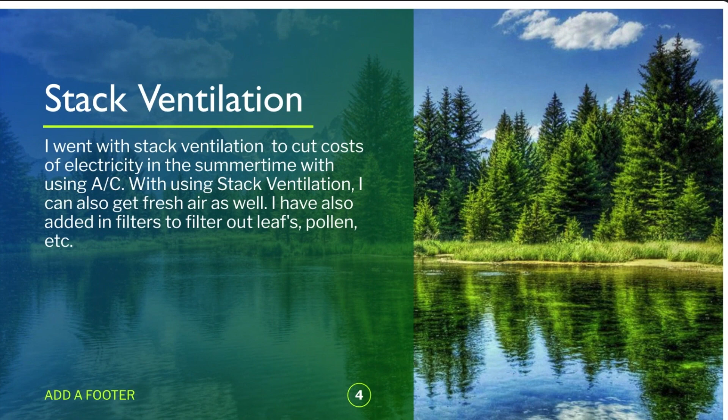In the summertime with using AC, and with using stack ventilation, I can also get fresh air as well. I've also added filters into the sustainable house, which you'll see pictures of, to filter out the leaves, the pollen, etc.

So rain runoff, I went with rain runoff because I can collect the rain in barrels and use it for other necessities that I may need, especially for the hydroponic system that I'm planning on having. The stained glass windows, during our research that we were going through, me and Elizabeth found out that stained glass windows actually are a sustainable resource. They're made up of recycled materials, but they can also bring in more light, and they also look very beautiful, and they can liven up anywhere.

You cleaned up? Put the paper and pencil away.

The geometry that was used in the Pennsylvania house was rectangular prisms, cubes, cylinders, half circles, and then the perimeter of the house, the area of the house, and the volume, you can see those measurements there.

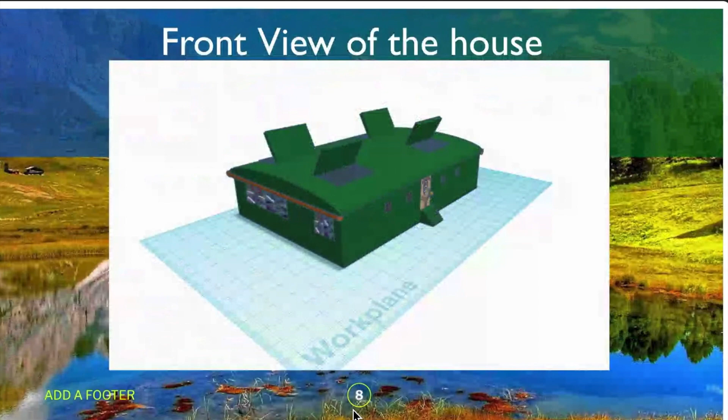So this is the front view of the house. As you can see, the stained glass windows are there. The filters are also in the stack ventilation up at the top of the roof, and this is only one story as well.

And then this is the back side. I like the stained glass windows. The orange is the gutters, which would lead to the rain runoff, and the colorful looking images are the stained glass windows, and then more of the filters and that stuff.

For the New Mexico house, we used rectangular prisms, cylinders, and semicircles. Inside the barn, we have stack ventilation, and then we have animals like sheep, chickens, horses. We have pigs at the farm too. For example, chickens are sustainable because they can provide both meat and eggs. Horses can provide transportation, and it's good not to use something that puts CO2 emissions in the air.

Our dimensions for the perimeter was 26.69 inches, and then the area was 42.84 square inches. The volume was 124.40 cubic inches.

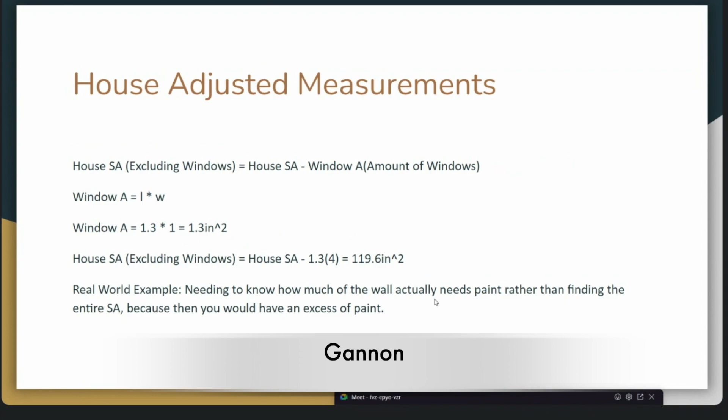You need to know how much the wall actually needs paint rather than finding the entire surface area, because then you're having excess of it. Then you have green roof material measurements. The green roof, you need to know the area in case your seed is per square foot or something, so you don't want to over or under purchase supplies for it. And then the perimeter, you might want to put a glass building around it to protect it from harsh environments, or a fence around it to protect it from wildlife.

The sustainability features. The Earthship-like home that we designed for Pennsylvania has an abundant amount of features which proves its worth in sustainability. We incorporated a green roof due to Pennsylvania's sunny summers, along with their nice rainy days. There are windows on the first floor and in the roof to allow natural airflow to flow within the house. There's also a smartly designed subfloor which is underground for natural insulation, meaning the portion of the house will stay warm throughout the winter but nice and cool in the summer, because it holds a certain temperature. As we could not add many renewable features to the design because of Pennsylvania's severe climate, it is still very sustainable and usable for future generations.

We couldn't add too many renewable sources of energy because in Pennsylvania you don't get a lot of sunlight, you don't really get a lot of wind because there's a lot of mountains, and there's no geothermal energy either.

The renewable food source. Whenever we were making this house, we realized that there was a unique way of incorporating a renewable food source. We added a green roof on the roof of the house so it gets natural sunlight and water, and it also occupies less space since it's not on the ground.

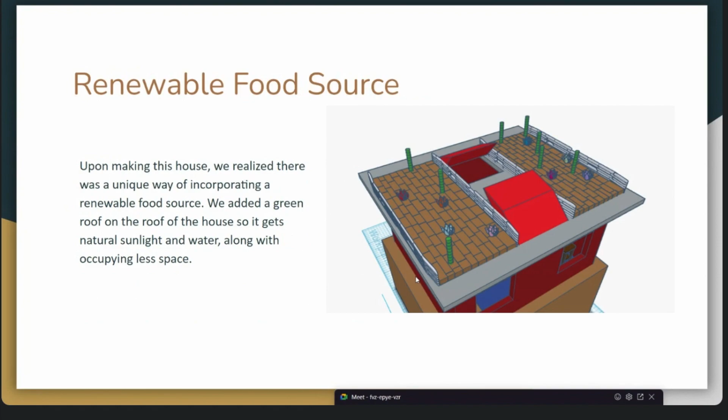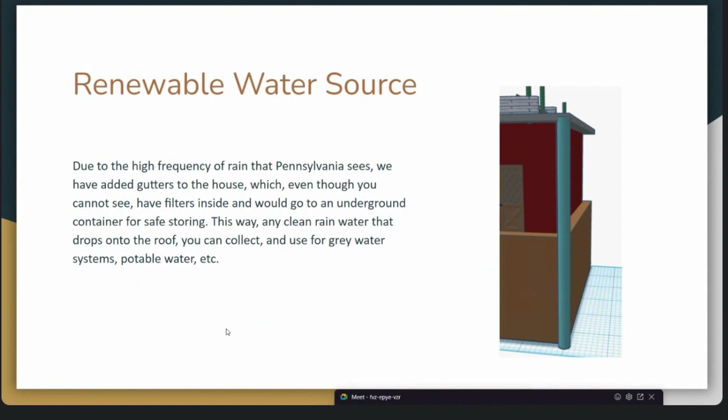Renewable water source. It has a high frequency of raining in Pennsylvania, so we added gutters to the house, which would have filters in them. We didn't model them, but the idea is that they have filters in them. Then they get collected into a storage container underground, so nothing can contaminate them. Then, if you have to, you can use them for gray water, potable water, and many other things, like washing dishes. That is the end of the Google slide.

This is what it looks like in Tinkercad. We did add stuff on the inside, but whenever it got scaled down for 3D printing, the other stuff wouldn't size down, so nothing's really to scale in there.

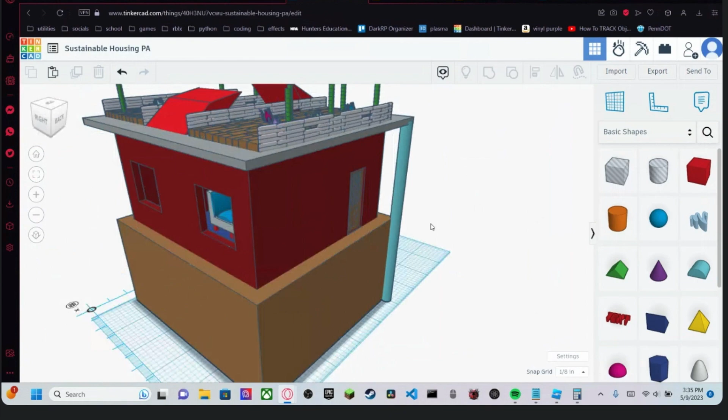The brown part represents the dirt, the part that would be underneath the ground. The red part represents the stuff that you would see, the gray is the roof, and up top are the gardens with the two windows. So that's our Pennsylvania house. It has solar panels, a water collection system, green roofs, and windows, to say more.

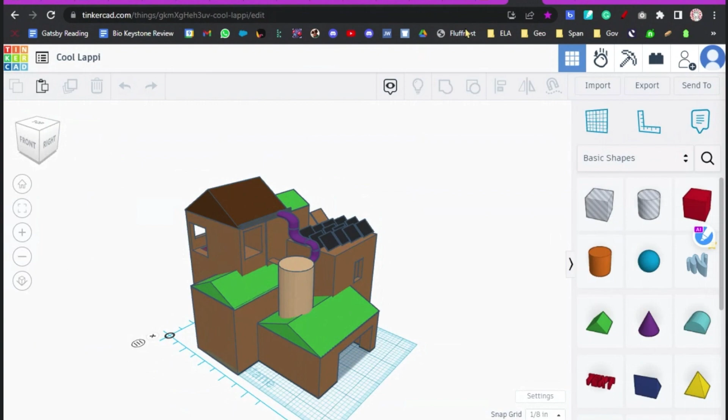So, and the Pennsylvania house has green roofs, arches, windows. Oh, Clinton, Jude's going to talk about the Pennsylvania house. Oh, okay, yeah, I'll talk about it.

So currently what we have, or what we're finishing with, is the green roofs, and we also have a lot of windows. I couldn't really make it that well in Tinkercad, but these are windows, and these are just open spaces because it opens into a courtyard. That means air is flowing through here, keeping this hallway cool or warm depending on the season.

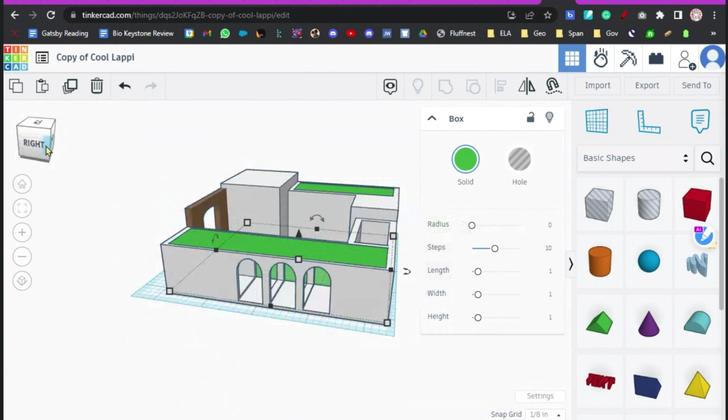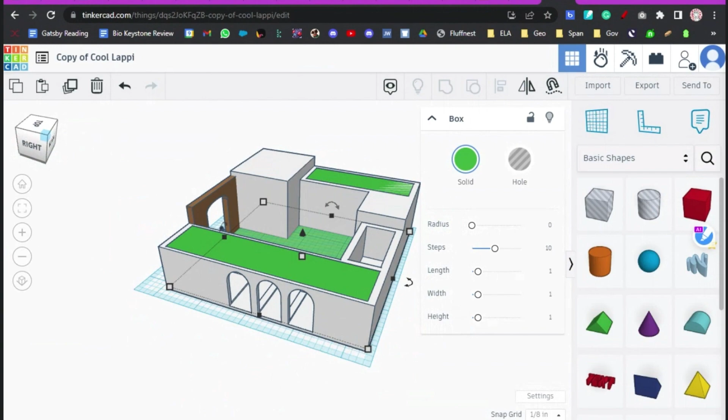Also, a lot of the shapes we use are just rectangles only—it's a very rectangular house. And the green roofs, I would have made them taller actually, but they can hold a lot of different types of organisms—plants, birds, rodents like squirrels or chipmunks. They can all live up there, and it really provides a lot to the ecosystem around them.

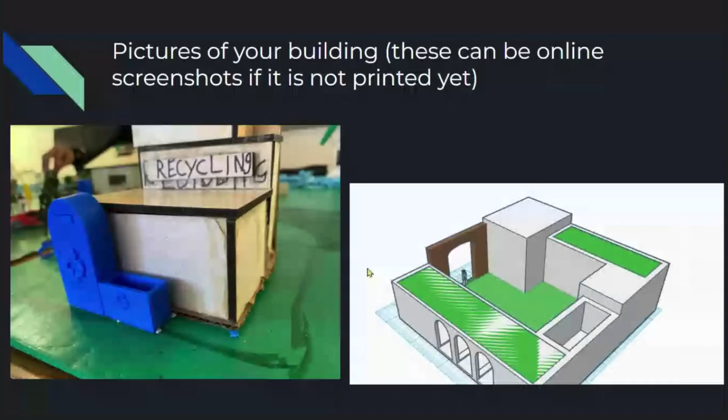And Wiley is going to now explain the sustainability features for each house and just kind of sum it up and sum up the volume.

Sustainability features: solar panels are on top of our roof. It improves air quality and reduces wasted water from energy production. Passive ventilation creates natural cooling and eliminates the need for electric cooling systems. The garden cleans the air and absorbs carbon dioxide and other air pollutants.

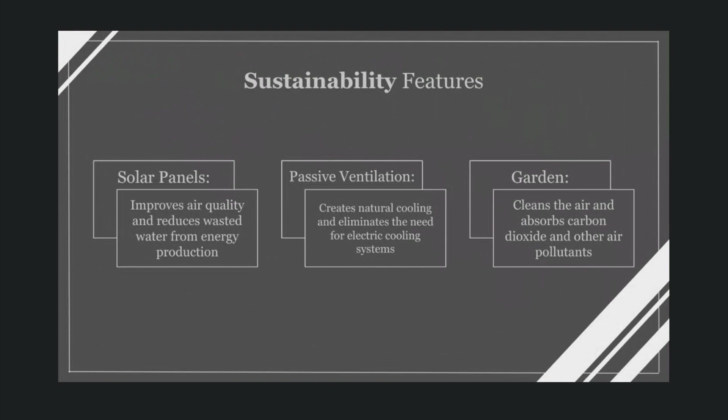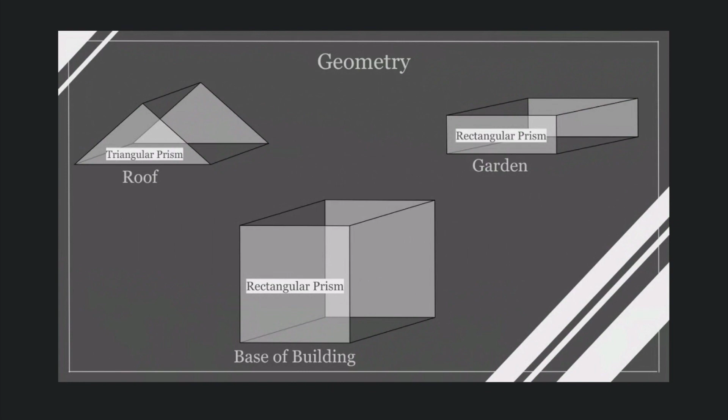Geometry: the roof is a triangular prism on top. A rectangular prism is for our garden, and we have another rectangular prism.

So Anya is the master designer here on the interior and everything. There's a lot going on in the middle. We have the master bedroom, the office and bathroom, the second bedroom, the living room, the kitchen, dining room, and pantry sections.

Here's the master bedroom, the office and bathroom, the second bedroom, and this living room.

And the disposal bins for our recycling and trash. And then the kitchen and everything.

We have wind turbines because in PA that is one of the most sustainable uses of energy since we don't get a lot of sun here, unfortunately.

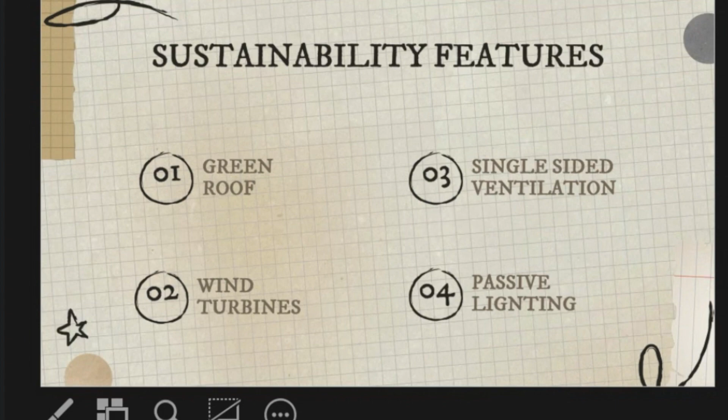Do you want to take the last slide? Yeah, so the windows, cement, cloth or furniture and stuff, and the wood—I don't think they could be considered sustainability features, but they could be considered eco-friendly. The windows are made of aluminum, which reduces having to cut down a ton of trees, and it's the third most abundant element in the Earth's crust, which means there's a ton of it and we can just use that.

The cement, which I think is pretty interesting, is made out of mainly cement but 15% limestone, which has healing properties. Usually a building would start decaying after a while, but when cracks appear in the cement, the limestone heals those cracks, which makes the building last longer.

The cloth would be made out of linen, which comes from the flax crop, which is a lot better than a lot of man-made materials like poly-something—I can't remember the name—but it takes hundreds of years to decompose, which really isn't that great for our environment.

Stuff like counters use the triangular prism, which isn't very abundant in our building but it's still there. Rectangular prisms make up the majority of it—the house itself and a lot of the materials. And then lastly, cylinders, which are also very frequent in the furniture.

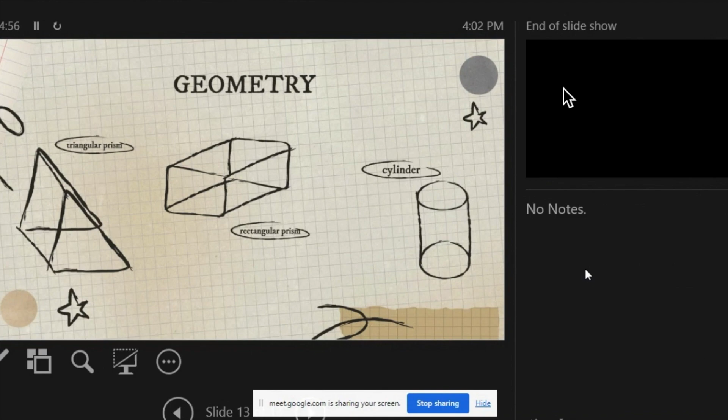And that's all. Water—so we filter it, and then we can use it to water our plants.

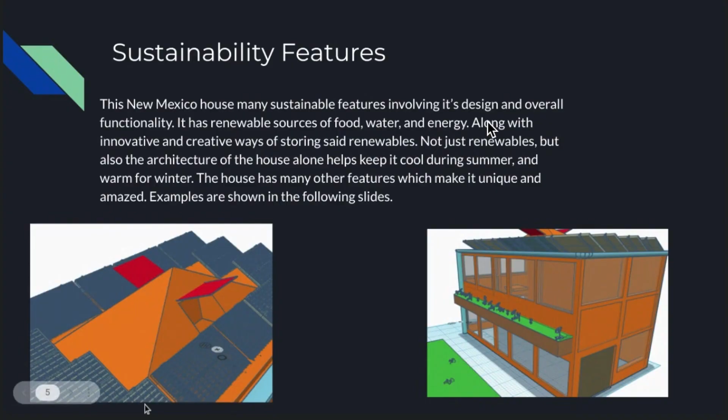Renewable food sources: the garden and flower box alone provide food and natural attraction for bees and other insects to pollinate the plants which are being grown.

There are sprinklers in the garden which take the collected rainwater and other sources of water and distribute it evenly among the garden. If you would want to cut down on energy further, you could disable the sprinklers and use the collected water by hand to water the plants.

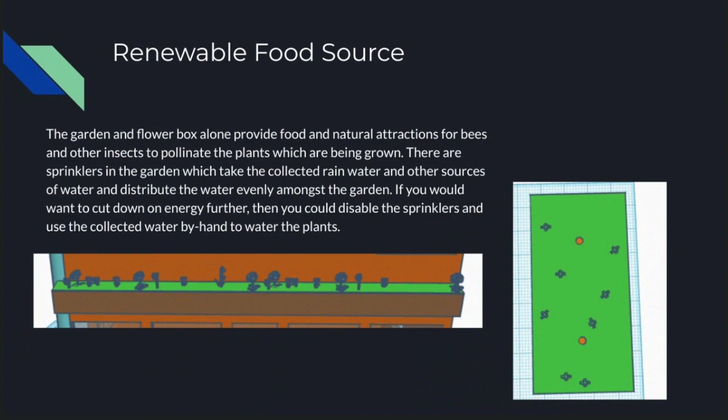Renewable water source: as mentioned previously, there's a rain collection system. The rain falls, goes down the gutter, and then makes its way through several filters and into a storage container for safekeeping. Although we did not model a filter or storage, we have developed a way it will be stored underground and used similarly.

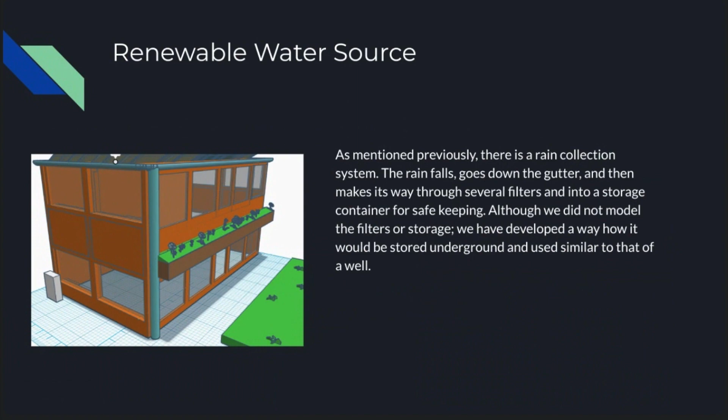Renewable energy source: there are many solar panels on the roof of the house, and geothermal pumps due to New Mexico's conditions.